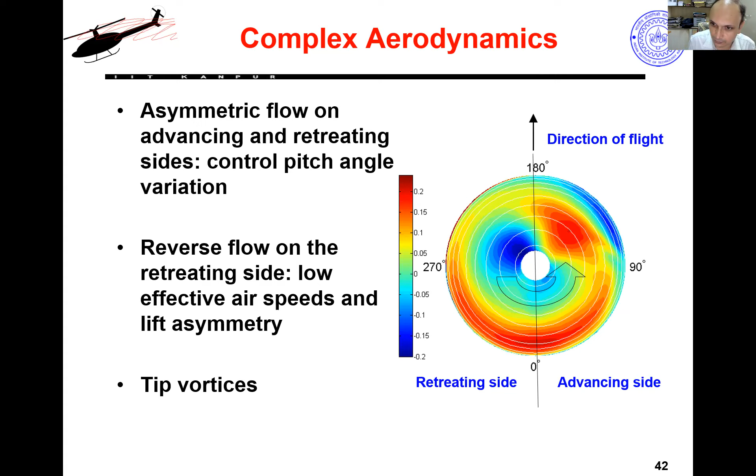Because if I reduce my RPM, one thing is absolutely clear: I have to decrease my tip speed one way or the other. For a given rotor, the only way I can decrease the tip speed is by decreasing my engine RPM. So let's say I've decreased the engine RPM, but now I cannot have enough thrust, I cannot have enough propulsive force forward, because my rotor only gives propulsive force also. So that's why now I go back to the picture of compound helicopter.

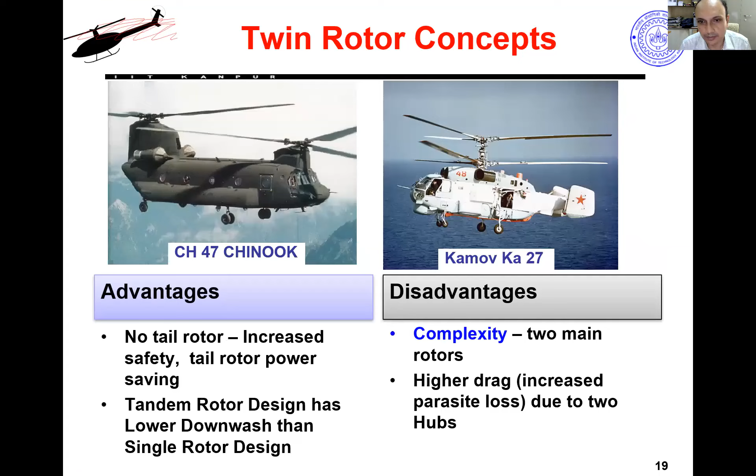And my forward propulsion, the thrust required to go forward, also comes from these propellers. So the advantage of this is that now my helicopter doesn't have to tilt forward. My overall helicopter drag is reduced because I can have a more streamlined shape and so on. That is the whole idea behind compounds like the Fairey Rotodyne and X3.

But X2 does something different. It actually has two counter-rotating rotors which are very, very rigid, called a lift offset rotor. There is a lot of theory behind it, but I will not go into the details since we won't be worried about it in this course. They also have a propeller at the back, which gives you forward propulsion, but all the lift comes from the rotors only. There is no wing in this. So they are only doing thrust compounding.

The deficit, the reduction in speed of one rotor, would decrease my lift. So you have added another rotor, and now two rotors combined will give you enough lift. In the other case, they have said, fine, the reduction in lift will come from my wing. So that's what Eurocopter has done. Both these guys have gone with very different approaches.

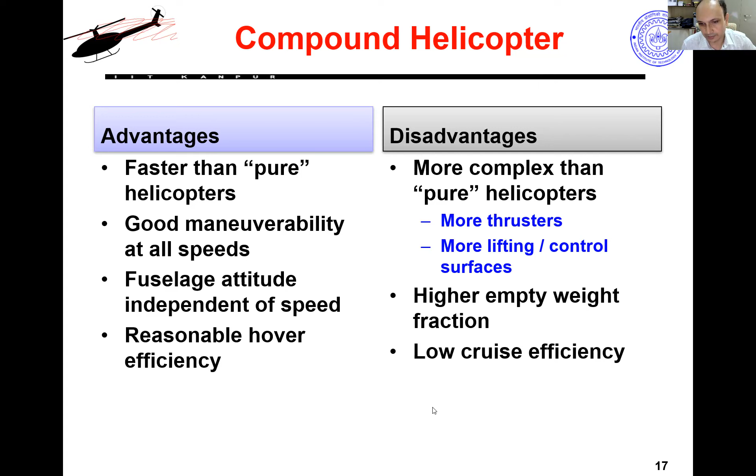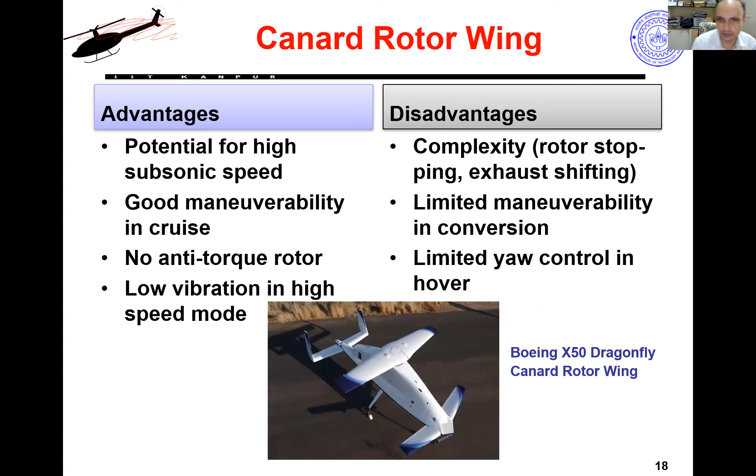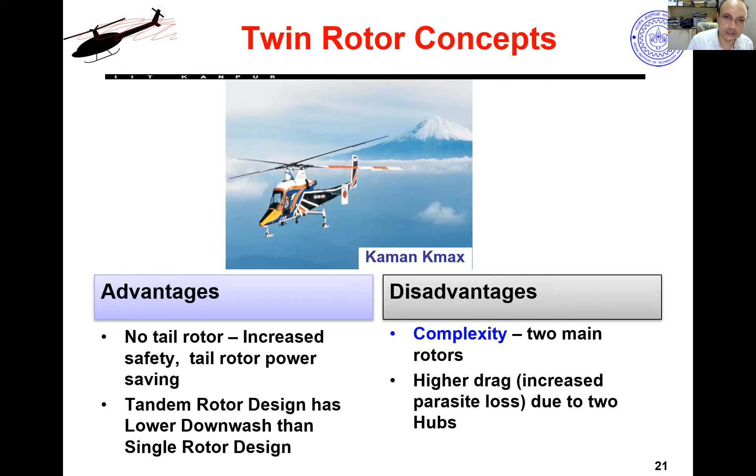We already talked about twin rotor helicopters. Another twin rotor helicopter is the Kaman K-Max. All these designs have the advantage of allowing more lifting capacity, and there is no loss because of the tail rotor, so to speak.

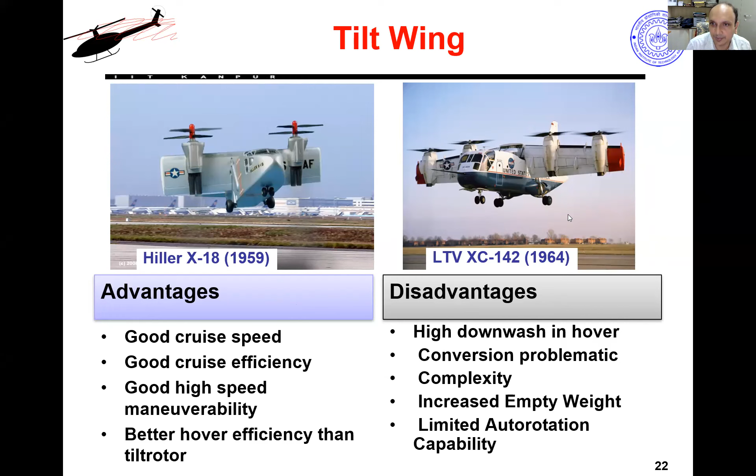The idea is that I can take off and land with my propellers straight. After taking off, I tilt my propellers and wings forward, and go into forward flight like an airplane. But the transition becomes very complicated and challenging for some of these vehicles. This technology was beyond designers' and engineers' league back in the 60s, but now it is happening again, and a lot of interesting things are being developed.

Another option is that instead of tilting the whole wing and propeller, I only tilt my propellers. That is being done in the Osprey, which is the Bell Boeing V-22. It has a really good maximum speed and good maneuvering capability. When I tilt my propellers forward, I become an airplane and fly very well. So this is a very interesting platform.

It also has some challenges. There have been some crashes of the Osprey, but nevertheless it is still in production, still being used by the American Army, Japanese Army, and Australia probably uses it too. It's a very versatile airplane and serves the Army very well. It was used extensively in the Afghanistan war.

It allows you to take off and land from anywhere and travel with speed comparable to a turbofan or turboprop based airplane. So you can fly with speeds of a typical cargo airplane. It's quite a unique vehicle, though complex with higher empty weight, but nevertheless it has a niche because it can go at 300 knots very easily, so it can fly at around 500 kilometers per hour.

That is the advantage, but this cannot be used for hovering for long, and it cannot maneuver so much at lower speeds. Mostly the objective is that you simply vertically take off, transition, and fly like an airplane. You wouldn't want to fly in helicopter mode for long.

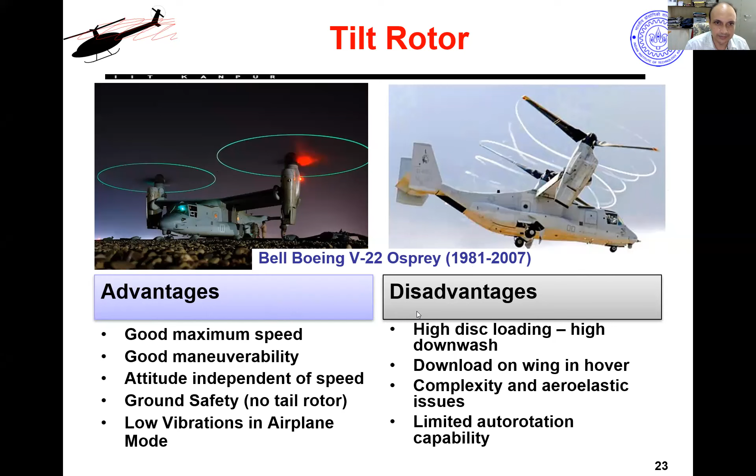Some other designs were tried, like tilting ducted fans, where ducted rotors were tried with the idea to tilt them. There is a lot of challenge in this. People are even trying this now, but here the aerodynamics becomes a big challenge because ducted rotors don't like edgewise flow. So if I have a ducted rotor and want to drag it sideways...

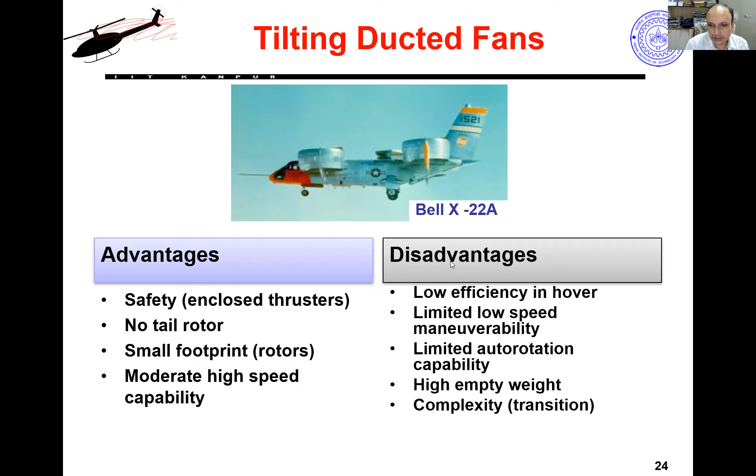So this is again complex, with high empty weight and so on, so it was not successful. Other design is this rotor embedded inside the wing of an airplane.

One such vehicle was the Vanguard Omniplane. Once again, people are exploring this kind of design of having a fan in the wing with a lot of variations. There was one Project Zero by Agusta Westland, and Boeing also has been dabbling with the fan-in-wing kind of concept for their X-plane competition.

This Urban Aeronautics Air Mule is a design which has been under development for ages. It was an Israeli company, and they originally started working on it in the late 1990s. When I started my PhD, I got to read about this, and even now it is not a successful design. It had a lot of problems and issues, so it never got working. So all these designs are complex.

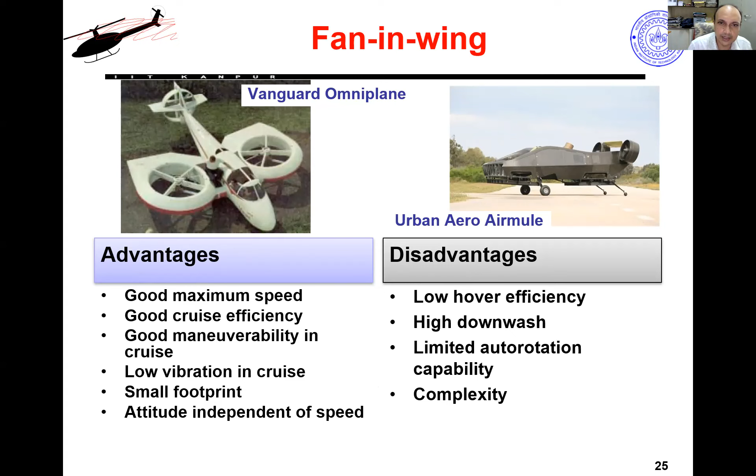An open system like this is not very convenient, though it may have some advantages. The tail of this vehicle is a very unique tail, called VTDP, vectored thrust ducted propeller. So it's a propeller with a duct, and then there is thrust vectoring using some vanes and so on. All this makes things quite complicated, and in the past this idea did not work very well. People are now trying to overcome some of these challenges using more recent technology.

So I was talking about the X-plane competition. DARPA, which is a US defense arm, always poses problems which are very futuristic - whatever the army or defense people would need 20 years from now, they try to do right now. So they throw impossible, very challenging problems. They put out this X-plane challenge, where the objective was to achieve 300 to 400 knots of speed.

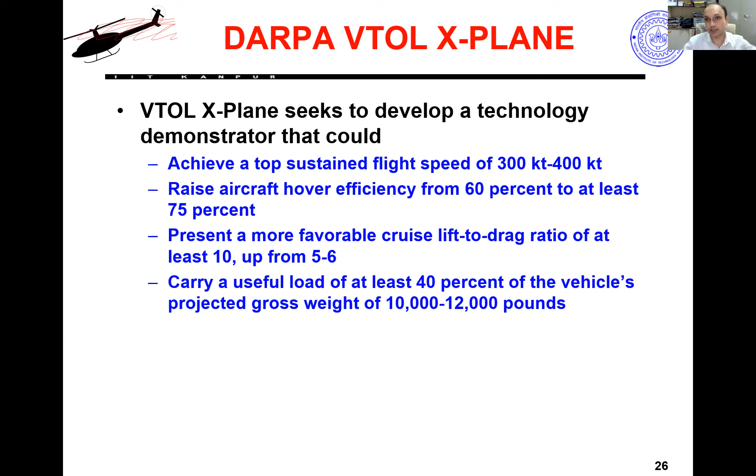So you make a 5-ton class vehicle, which should be able to lift a payload of 40% of 5 tons - so 2 tons of payload should be there - and it should have this high cruise efficiency and very high hovering efficiency. So it's a very hard and almost impossible problem right now.

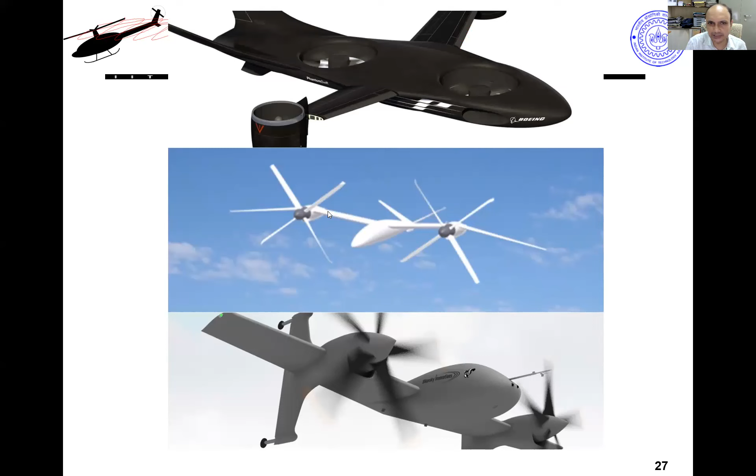But nevertheless, a lot of people tried. This is Boeing's design - part is a ducted tilting rotor, then two ducted rotors are embedded like a fan-in-wing kind of thing inside the fuselage. This is Karem Aerospace, which had a variable speed tilt rotor or similar tail concept, and Sikorsky was working with some tail-sitter concept. So different companies have been trying to develop different kinds of solutions based on their understanding. It's still ongoing, I believe, and some stages have been completed. These are all scaled models everybody has made, not the full vehicle.

And finally, the last way of doing vertical takeoff and landing, and probably the worst way of doing it, is by using vectored jet lift.

My video has disappeared from here. Let me see if I can find this video. This is what?

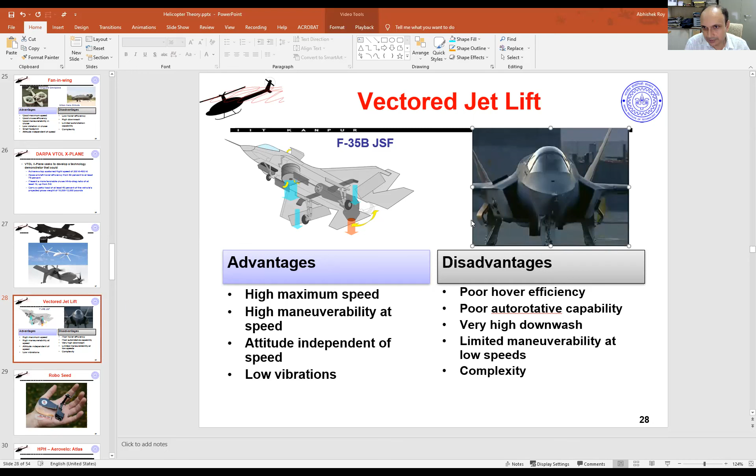F-35 Lightning, yeah, I cannot find this. I'm just trying to dig out the video of this particular flight. Okay, I don't have it. Somehow this link has gotten bad. Yeah, it is an embedded video. Yeah, it's there in some of my other presentations, but here the link is messed up.

The video was that of the F-35 Lightning, where you see this tilting of the exhaust nozzle, and there is a fan embedded inside the body. There are doors here which open up. You can check out videos of the Lightning doing vertical takeoff and landing. They tilt this nozzle, open this hatch, and the rotor is spun. From the sides also they direct some of the exhaust. With these 4 points of thrust, the whole vehicle lifts off vertically. Not very efficient, but good for a fighter plane, which is anyway not a very efficient thing.

So this is the stealth fighter, a 5th generation aircraft, which can do vertical takeoff and landing. This is one way you can get very good speeds and high maneuverability at higher speeds, but you cannot expect it to hover efficiently, do auto rotation, and things like that. So those things are anyway wrong to ask of it.

If you guys have seen Die Hard 4, have you seen it? In that movie, they show this airplane. At one point, Bruce Willis jumps over this hovering airplane and fights the villain. If you have not seen it, you can check it out and you will see this airplane in motion, and you can see the fan nicely spinning.

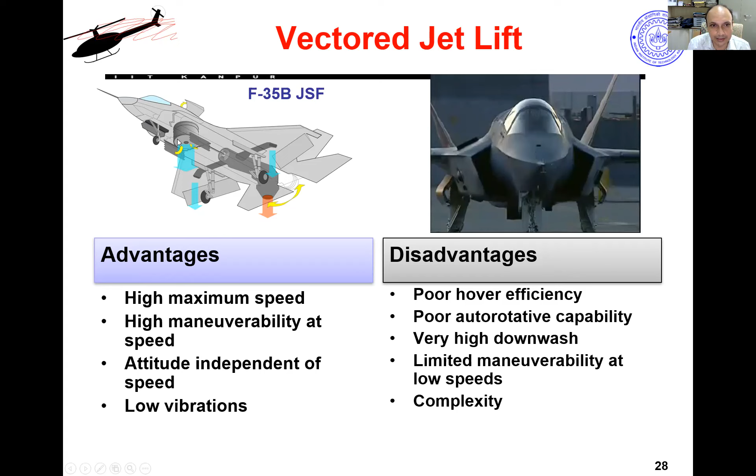Apart from that, a lot of other experimental designs are there. Here is an idea of a robo seed built at Maryland, where they tried to make a powered maple seed. You remember the maple seed from last class, right? Same maple seed, now powered up. He tried to make different variants of that, and you can see this robo seed flying inside an indoor environment.

With a controller in place, it can actually fly quite well. So this is how it looks like. Now I'm doing outdoor flight also, manually. This is how the final design evolved to be. Here you had batteries, a motor, a few propellers, and this Samara shaped blade, which also has a pitch control here.

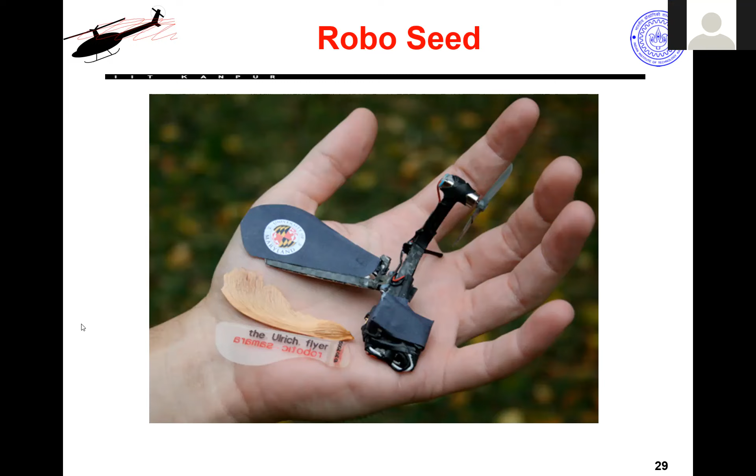So with that, you are able to see the video, right? No sir, no sir, yeah right. I mean, by mistake I have actually shared the wrong presentation. Okay, let me go back. I thought you were seeing it. So I'll stop the sharing thing, okay, and I'll share my whole screen. Then you'll be able to see.

Now you can see, yes right. So you are able to see it here. I'm going to the point where we had put the static picture. Okay fine, well let us see this part. So you can see the video, something is flying. Yes sir, so in a moment we'll be able to pause it and see actually how it looks.

So there's some outdoor flying also shown. That part where we put the picture nicely, yeah this is somewhat okay. So this is what he is flying. In this you can see the Samara shaped blade, shaped like a maple seed. The propeller is at one end, and at the other end you have the battery and stuff. So this is the vehicle.

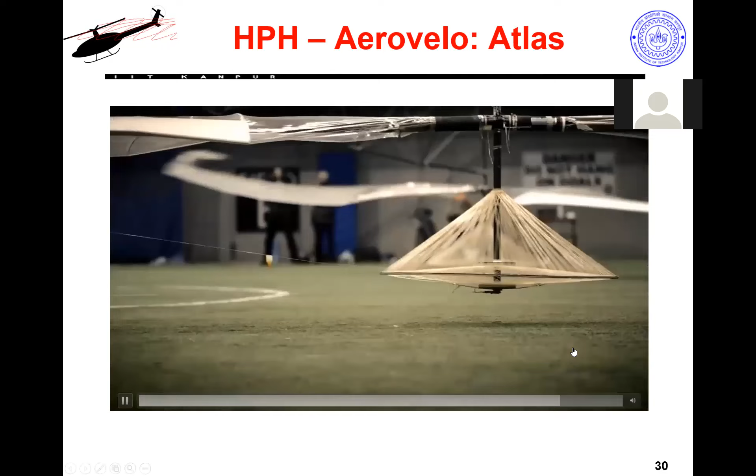So you just saw the impossible being made, right? The challenge was to fly for at least 1 minute. Oh, okay, and that is what was done. Okay, and two teams were competing very closely. University of Maryland, my alma mater, there was a team there who was also attempting the same thing.

These guys were actually inspired by the Maryland team and started after Maryland. But Maryland actually had a huge problem of not being able to test this very frequently because of lack of space. Maryland is a big university and finding space to do this experiment was very challenging for them. As a consequence, they were slightly behind, so they achieved the same thing, but one week later than the Aerovelo team.

The Aerovelo team is from Canada, University of Toronto, and these guys actually won this Sikorsky Prize. So yes, you cannot keep flying the helicopter forever, but for 1 minute it was achieved. It was achievable. And of course the guy who was flying it was a trained cyclist, so you see, he was pedaling all the time.

And they were all undergraduate students actually, mostly, with some graduate students supporting them. Similarly, in Maryland also, most of the work was done by undergraduate students, and some graduate students were guiding them. So you can see what kind of things can be done if you are really determined to do it.

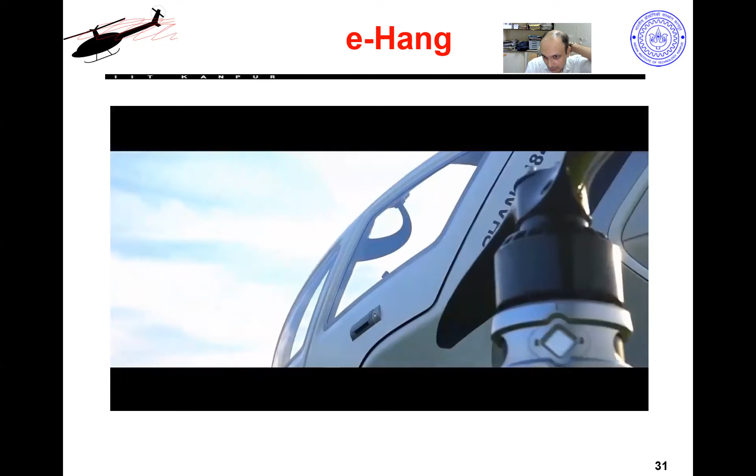This is a horribly designed, worst kind of air taxi one can make. And because Dubai has a lot of money, everybody goes to sell their stuff, show off their stuff to Dubai people, because there they care more for fancy toys. People with a lot of oil money are always looking at all kinds of toys. So there is a guy, he calls this air taxi in Dubai.

The air taxi comes and lands. Well, first takes off. By the time he's coming out, the taxi will come and land for him in his lawn. You have big lawns there, no wonder. Okay. So he puts his laptop behind and sits inside this driverless, pilotless aerial vehicle.

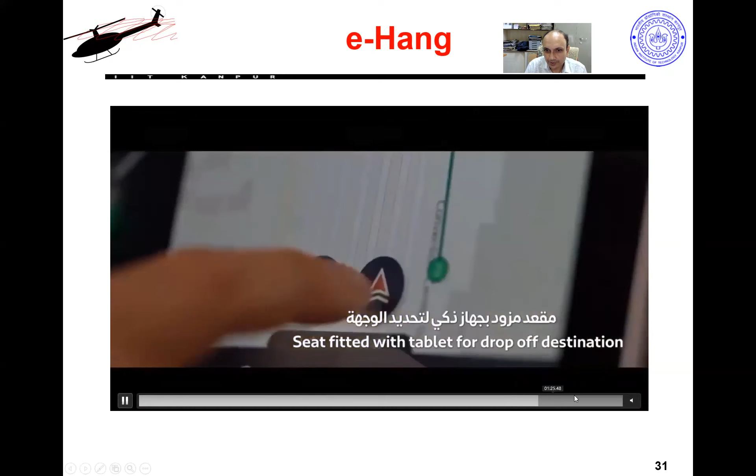And then enters the destination, and the vehicle takes off and takes you there. So this is just a big giant multi-rotor, not at all something which you would prefer or expect to run efficiently over a period of time. So this is not quite the best possible design for an air taxi, but nevertheless easy to do, and you could be the first to do it.

Similar things have been done by many people, like there is a company called Kitty Hawk. Incidentally, these guys from Aerovelo, who won the Sikorsky Prize, were all hired by Larry Page. Who is Larry Page? Related to Google, yes, Alphabet, CEO of Alphabet, and co-founder of Google, right? So he has a lot of money.

So he has invested in a lot of air taxi companies. Kitty Hawk happens to be one. So he went and hired this entire Aerovelo team and brought it to Kitty Hawk. Earlier, Kitty Hawk was actually run by an ex-faculty member of Stanford. What is his name? I forget his name all the time. Anyway, so he was running Kitty Hawk initially. Yeah.

Right, so they have made this. My only dream from childhood, I remember, was when I could fly, and it was such an amazing feeling. So they made something called Flyer. It has to be real.

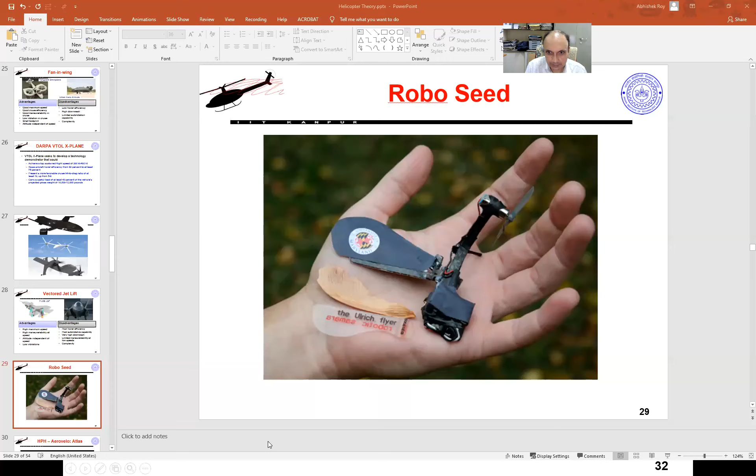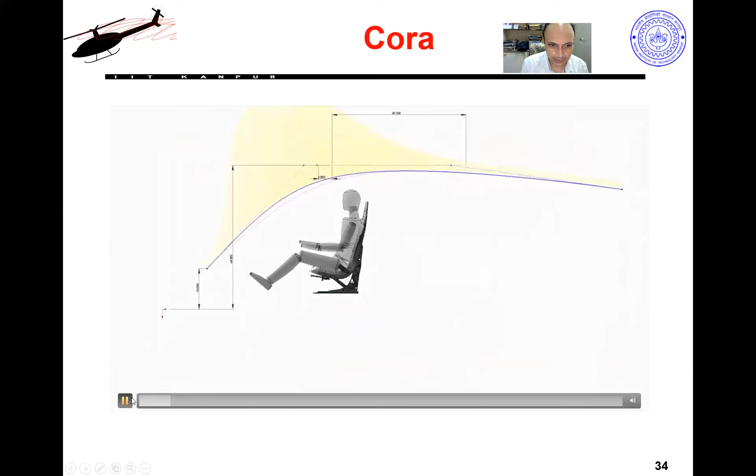Sorry, I need to take my call now. It's coming and it's going. Yeah, I don't know. Anyway, let's continue. Yeah, it is hung up.

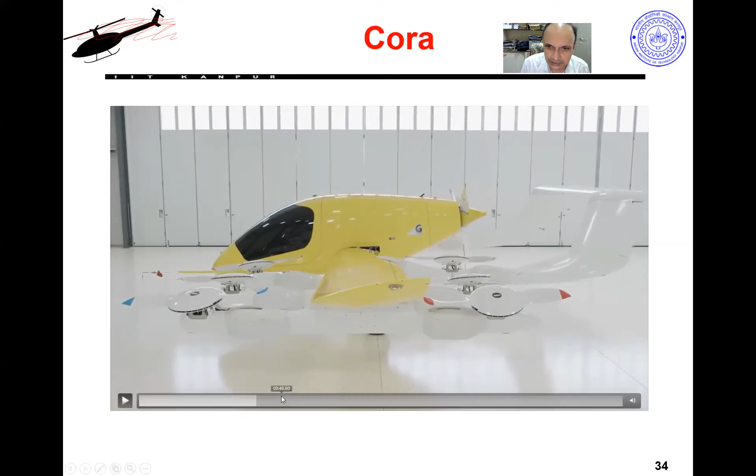So this is Sebastian Thrun, CEO of Kitty Hawk. They made this vehicle. As you can see, it has a lot of these propellers, short propellers, bad efficiency of the propellers. Smaller propellers are not very good. So you have a ton of these propellers which are used for takeoff and landing, and then you have another propeller for forward propulsion. Like a quad plane, a multi-rotor with an airplane, or a multi-rotor stuck to an airplane. Very bad aerodynamics, bad engineering. Works fine, but I don't like such vehicles. Aerodynamically, they are really dirty, not very efficient, may not work in the long run, but it's okay, I mean, to prove the concept and so on. So that is Cora, from Google.

So right now there are so many different people doing a lot of different vertical lift air taxi concepts in America. In India, also some people are trying, but most of the people who are trying, frankly speaking, don't know what they're doing.

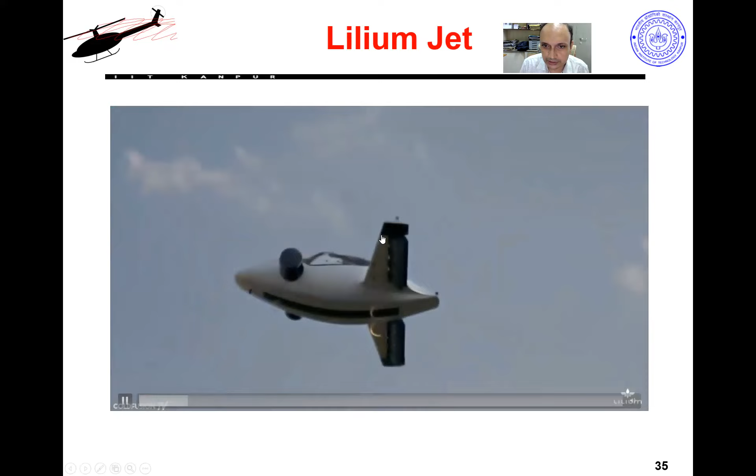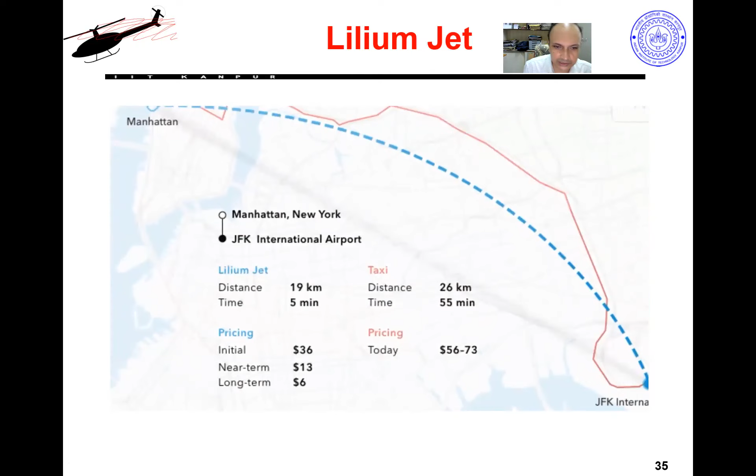So anyway, here is a very different kind of thing. Well, not different, but this was also a unique and exciting idea from a company. Sorry, Vahana. I thought initially Lilium Jet. Yeah, so this is Lilium Jet I was showing, and it somehow went to another video. Right, so Lilium Jet is also under extensive development. They use these tilting ducted rotors or ducted fans on the trailing edge of the wing. These guys have raised a lot of money. They are working, they have some tall claims about what they intend to achieve. So yeah, this is the design, they have some 36 ducted fans.

20... 12 of them in the front and 24 in the back. So in the front they have a small canard, and in the back they have a full wing. These are mounted at the tip of the wing, at the trailing edge, and it gets tilted.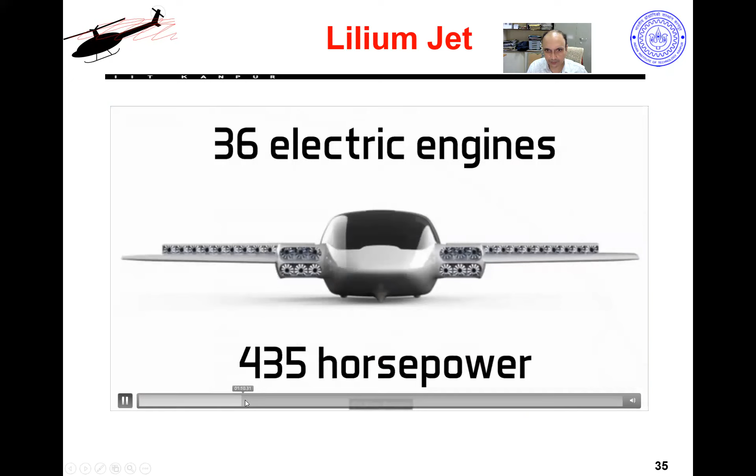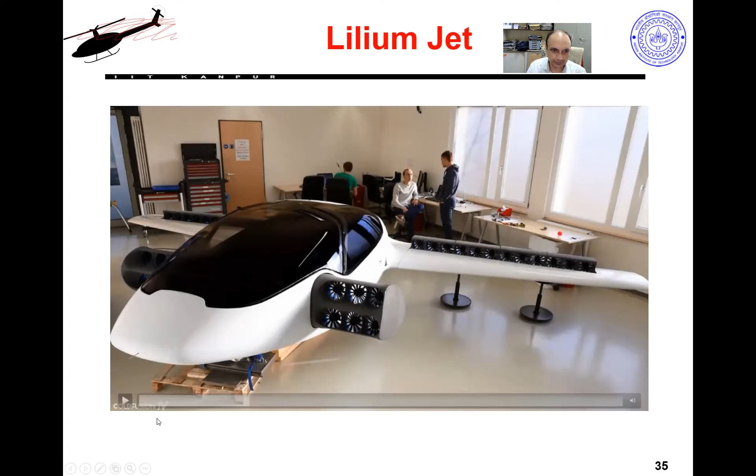Maybe in this video, when it takes off, you can see. They hope to achieve 300 kilometers per hour speed. So here you can see this part - this entire part actually tilts back and forward. And likewise here, the whole thing tilts to horizontal orientation or remains vertical.

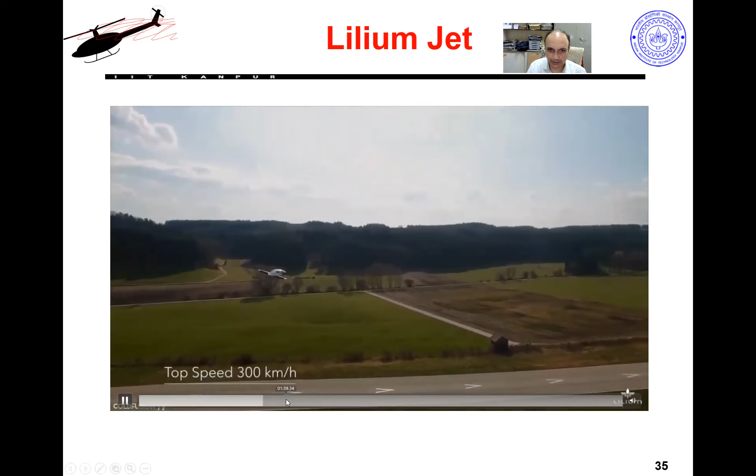This is what they hope to achieve. Right now they are not even close to that. They have been developing it for quite some time, and they have done full-scale tests very recently. But my concern is that this could be very, very noisy.

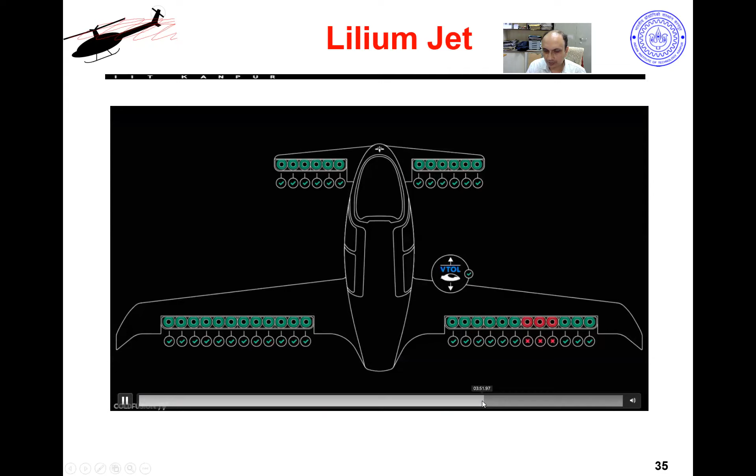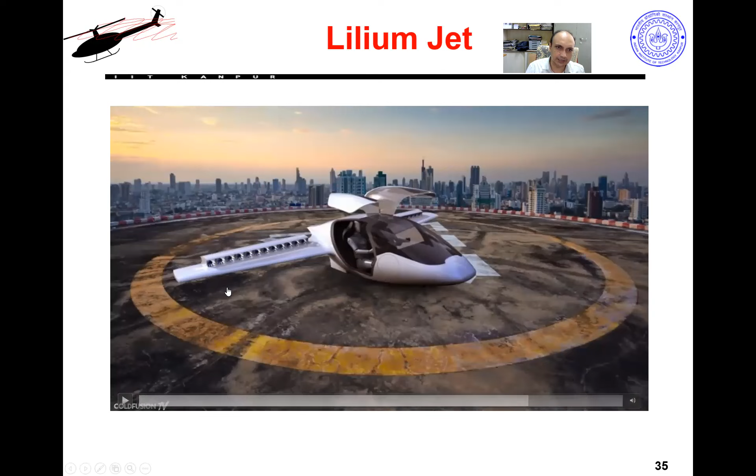It's still under development, a lot of things to be done. Only time will tell whether this idea is fine. But my concern is that these ducted rotors are very noisy, and noise would be a very critical consideration for all urban aerial mobility vehicles, all air taxi concepts. This is Vahana, which was developed by Airbus.

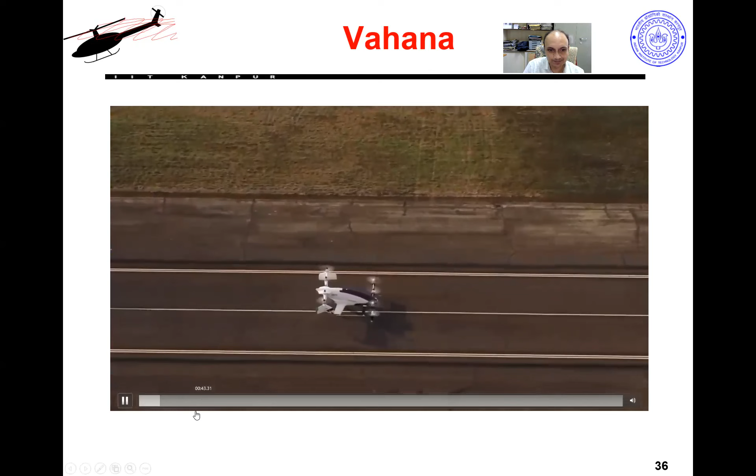Interesting name, an Indian name, because Germans have a lot of fascination with Sanskrit - so somebody chose this Vahana name. This Vahana, they have built 2 prototypes, and now the project is closed. Airbus is now working on something different.

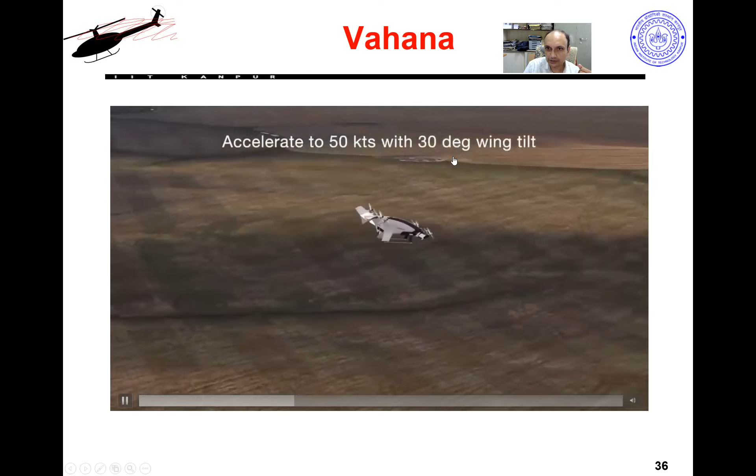So this was a tilt wing design - the vehicle takes off, and then you tilt the wings slightly forward and enter forward flight. This has a 30-degree wing tilt - it's still reasonably high, not like fully tilted.

And they did a lot of test trials to see how the vehicle performs. It has 8 rotors/propellers, each with variable pitch, and then there are elevators, ailerons, those kind of things also. So there are a lot of controls - all the RPMs can be changed also. They have around 20 control inputs, and they decide what control inputs to use to overall control the behavior of the vehicle.

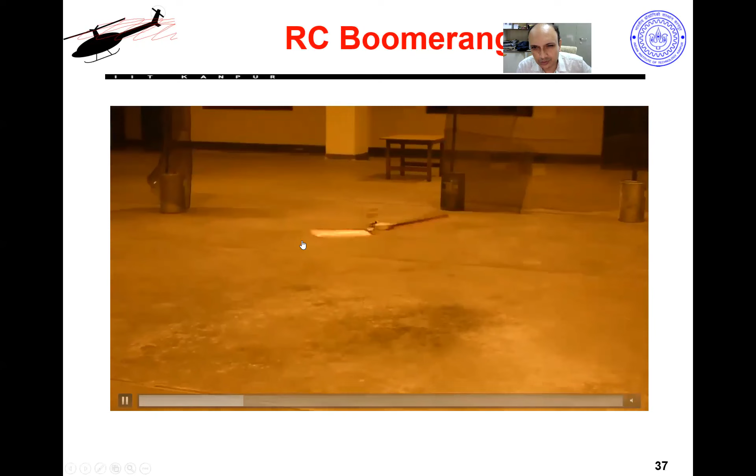So that's all - there are so many different ideas and designs. Here is something which we built here in our lab: a robotic boomerang, as we call it. It's a boomerang which is remote controlled with a motor propeller attached. Its idea is similar to what Evan Ulrich has made - that RoboSeed - but it's more like a boomerang and flies like a boomerang also. We claim this as the world's first remote control boomerang. Application is mostly recreational and fun kind of thing.

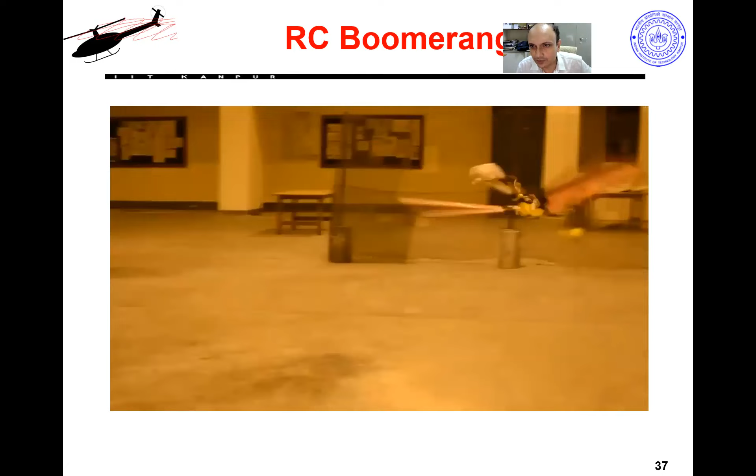I am the guy who is flying this actually, and it was rather easy to fly. I had never flown anything like this before - nobody had flown anything like this before - but it was fairly easy to fly. I'll skip this, not very critical.

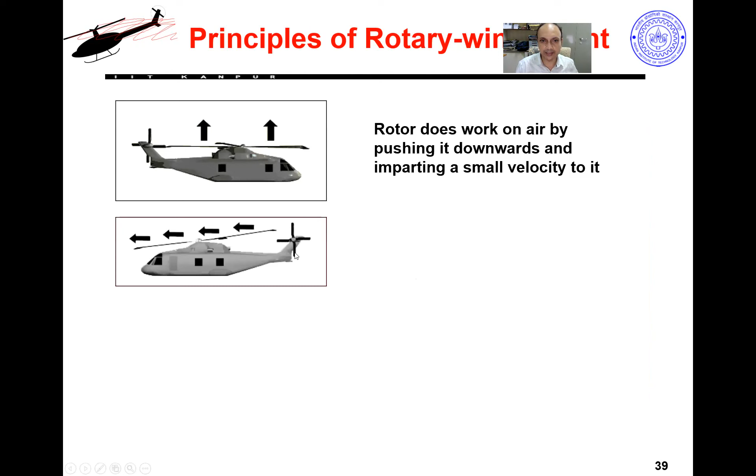That was the coverage of various things happening in the world related to rotary wing aerial vehicles. Now we need to get into more serious ideas - how helicopters fly, how they get controlled, and basic ideas related to helicopters. So the theme of the course will remain helicopter, but the technology we learn can be applied to wind turbines, all kinds of rotary wing aerial vehicles, airplane propellers, whatever you want - all those things would be also possible.

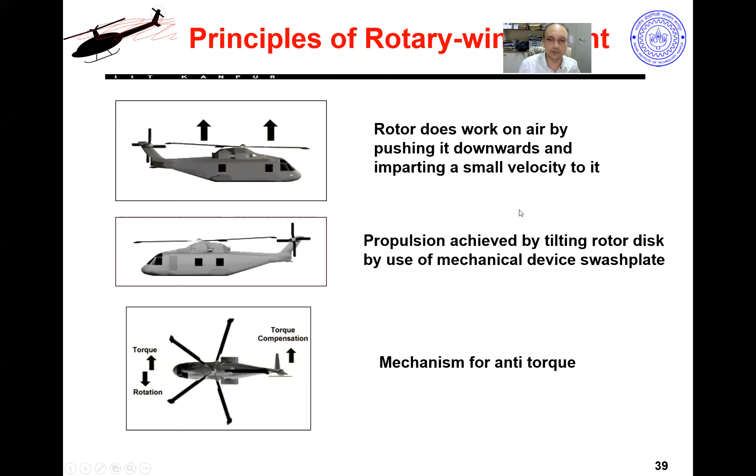The way a helicopter works is that your rotor spins, it does work on the air, pushes it down, and in reaction, air pushes the rotor up, and the helicopter lifts up. Now, if I want to achieve propulsion for forward flight, I tilt my rotor disc like this - the tip path plane tilts, and I get a small component of thrust in the forward direction, which gives me propulsion. Because there is action of spinning a rotor, there is always a reaction which has to be countered - this can be done either by putting a tail rotor or a second rotor spinning in the opposite direction. So that is essential - we require a mechanism for anti-torque. The question is, how does a helicopter fly? What are the main inputs and outputs in a helicopter? There is a video which shows some of these things.

So here is a pilot who will fly a Robinson R-22 helicopter.

So in this, what I wanted to see is the kind of controls which are there in a helicopter. In an airplane, normally you have a joystick which controls the roll and pitch motion, the up and down and turning motions, and there will be a throttle which controls the thrust. In a helicopter, we have this stick which he is actually holding, called the collective stick.

If he pulls that stick, the pitch angle of all the rotor blades will change by the same amount. So you will see once he pulls the stick, the collective pitch on the blade changing. The swash plate will move up - this is the swash plate. So he moved up and the pitch angle increased, which increases the thrust, and the helicopter will lift off by pulling the collective.

The collective stick also has a knob on it which you can turn, just like you twist the accelerator on a scooter or motorcycle. A similar kind of knob is there which you can twist with your hand, and this allows you to increase or decrease the throttle, the engine power. Pulling it increases collective and the helicopter lifts off.

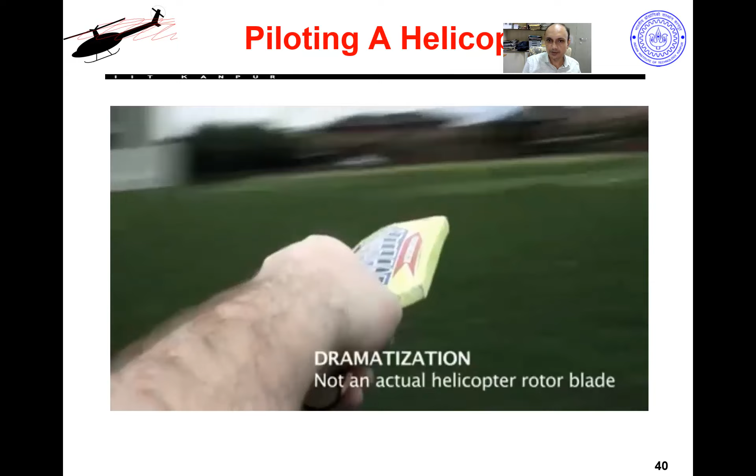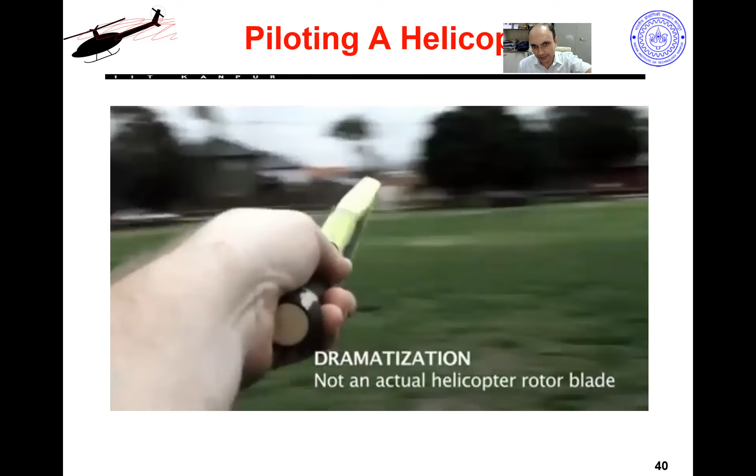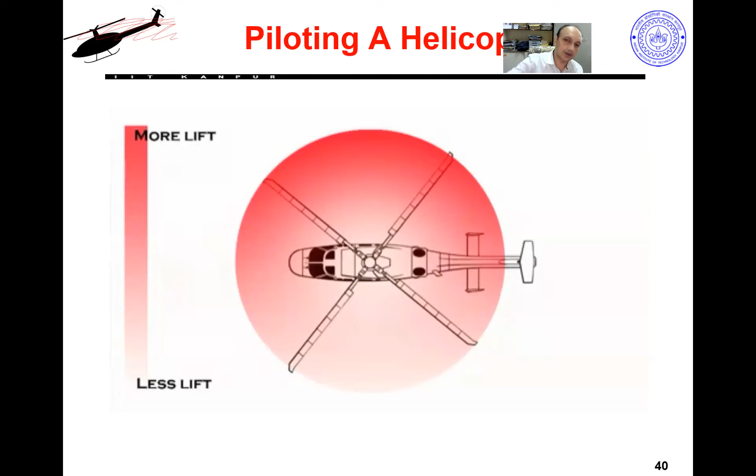By the way, I actually had a really nice video - I don't remember where it is, I'll have to dig it out - where they had put a camera on the blade, and you can actually see the blade moving and doing all the motions which it normally does. So that allows the helicopter to be moved in different directions using the cyclic pitch.

Student: So which one of those two is actually used to increase the lift - the changing of pitch angle, or the speed of rotation? Instructor: No, the throttle is only used to bring the rotor RPM to a particular value. Once you reach that RPM, the throttle is automatically controlled using the engine control system, or manually adjusted slightly to ensure the RPM is maintained. So the rotor RPM is not changed, it is maintained. Only the pitch angle is changed to do all the maneuvers - lift up, down, whatever.

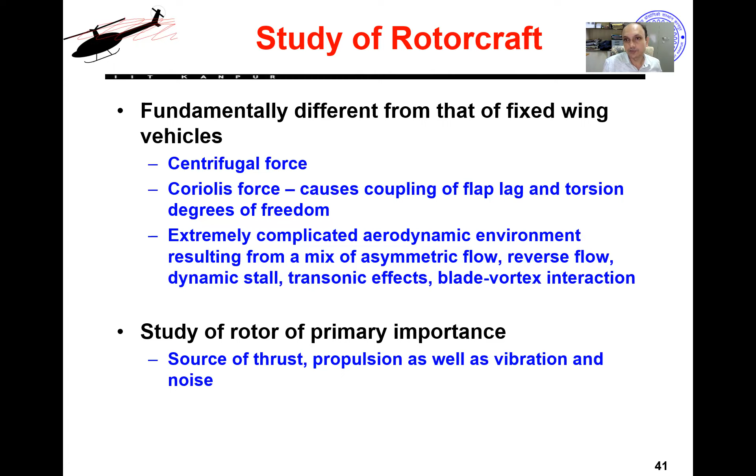All right, so let's move forward. That brings us to the fundamental question: why do we have a separate course on helicopters? Many of you are already trained as aerospace engineers, having done BTech in aerospace engineering, and some of you have a mechanical background. Nevertheless, why have a separate study about helicopters? What makes helicopters different from fixed wing airplanes? So the most fundamental...